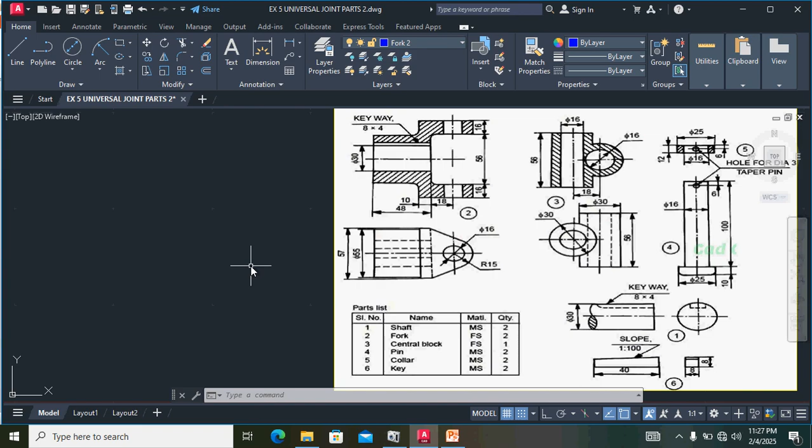Initially, we want to set the limits and set the limit units using the zoom command. So already we set that. Before this, I also set different layers.

For the shaft, I want to create one layer. Now I want to select the shaft layer. First of all, we want to draw the center line. So here we change to the center line, click the center line layer, use the line command, now we want to draw the line.

For the straight line purpose, we are using the ortho command. So we change the layer here, by layer, then we have to finish the center line.

After that, the diameter of the shaft is 30 mm. Here we go to line, change the layer by layer, next go to line, click this point. Here we want to change to the center line, by layer.

Now we use this line, click the line and click this point. The diameter of the shaft is 30, so we need one half side at distance 15, so give 15 mm. The length of the shaft is not given, so approximately we provide 100.

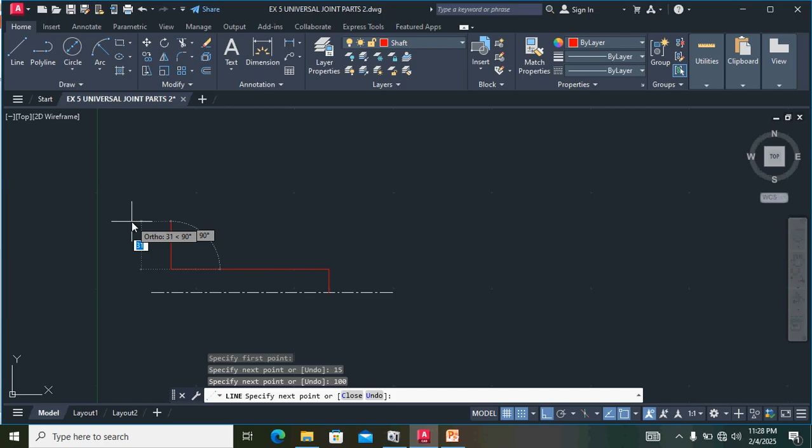Then we have to draw the line in the downward direction; the shaft diameter is 30, so we provide 30. After that, draw the line rightward, providing 100 mm distance. Then draw the line upward, providing 15 mm, then press enter.

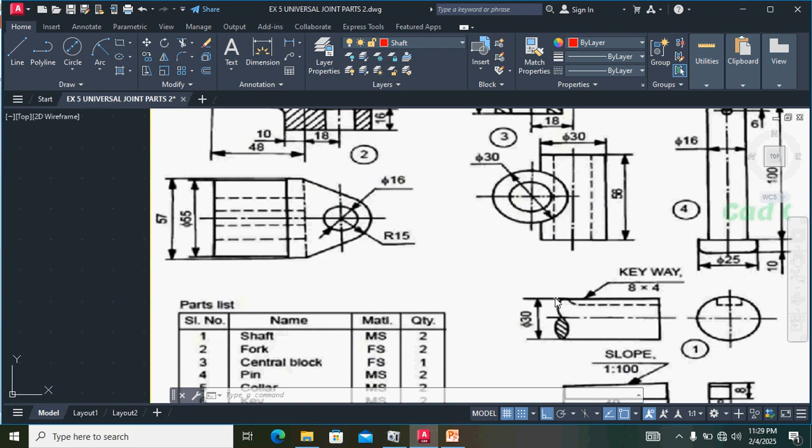In this case, we consider the diameter. We saw the shaft diagram; one end's shape is like this, so we want to draw this shape at the left side end of the shaft. Referring to the shaft diagram, for this purpose we use the arc command.

In arc, I want to select start, end, radius. So I click this point, click the start point, and here click the end point. Now I provide the radius value 25. So a 25 mm radius arc was created.

Next I want to select this arc and take mirror, mirroring from this point to this point. Now the arc was mirrored. After that I want to mirror both arcs together. I select these two arcs, go to the mirror command, click this point to this point as the axis, and then click exit.

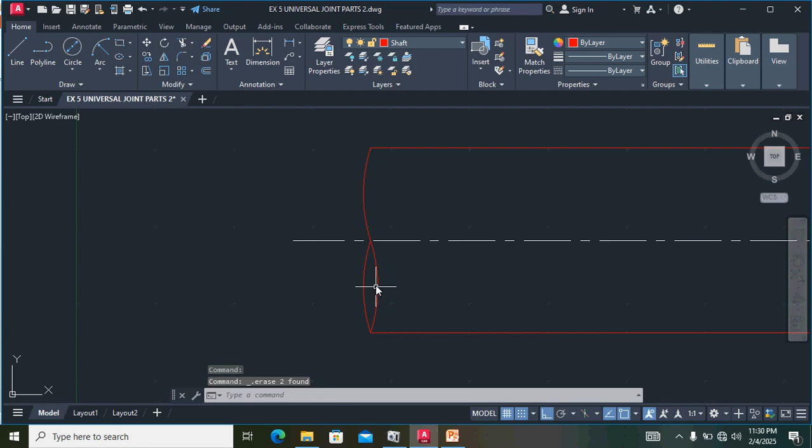Then finally we don't need this line and this side arc, so we delete it. In this area we want to apply hatching. For hatching purpose we click here and hatch this portion, then close the hatch creation.

Next, finally, we consider the shaft. In this case, they take a keyway at 4 mm from the top. So we select this line and take offset; the offset distance is 4 mm from the bottom of the line. Next we select this line at 80 mm, giving the distance 80 approximately, then we complete the offset.

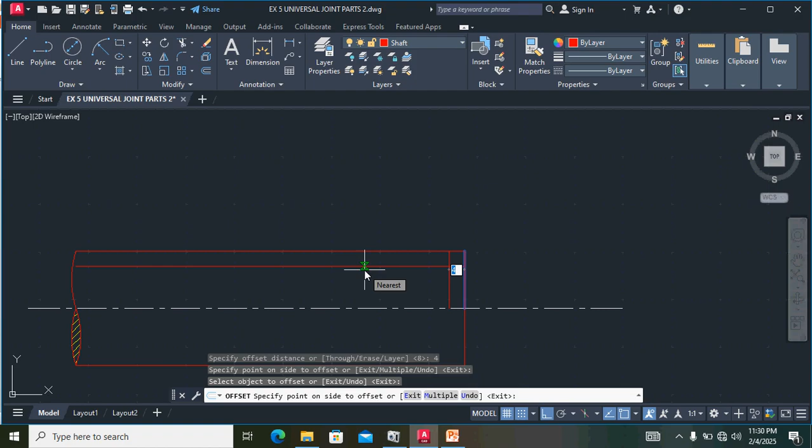Next we want to take a trim. So we provide a trim; this line we don't need, so trim this line, and this line also we don't need, just trim this line.

Next we want to take fillet for this portion. So we go to the fillet command and select this portion and this portion. In this case we need a radius, but since the problem didn't give one, we take an approximate radius of 4 mm. Next, click this line and also this line, so a 4 mm radius fillet line was created.

Next, this portion and these lines should be dashed hidden lines. So we select this line, go to line settings, and select dashed. Now we complete the shaft.

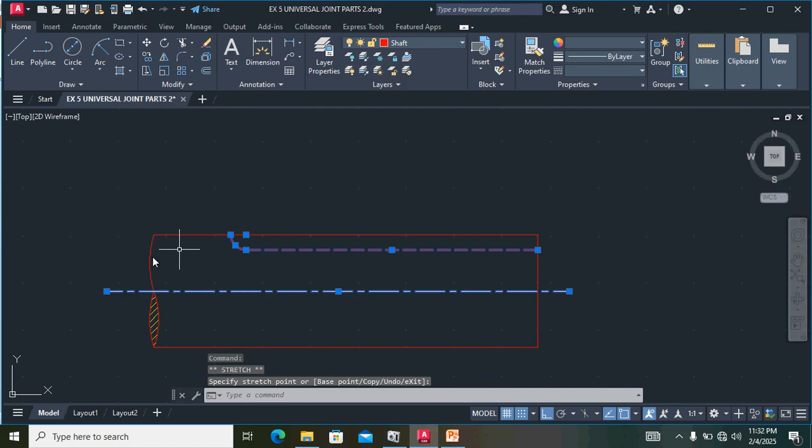In this diagram, in this concept, we have to reduce the center line. We want two numbers of the shaft in this diagram, so we have already completed one shape of the diagram.

Then we select this shaft and take mirror. Select the shaft and take mirror from the center point, from this center line. Now we've created another shaft.

Okay, now with the shaft, next we want to draw the fork. This is a fork component. So in this case, we want to draw the center line.

For the center line, we select this, copy this center line, and draw the center line from this point to this point. Copy and Control V. Next, we want to draw another line from this point to this point. So this is the center line.

So we already created one layer for the fork. We select this fork. Next we want to select the line. From this point, the height of the line is 28. Total height is 56, so one half of the distance is 28.

Click enter for this distance. Then we want to measure this distance. In this case, from the center point, the outer radius is 15 mm, so that distance is also 15 mm.

Select the line command and click the line from this point, 15 mm in the rightward direction. Click enter. Next, we draw the line in the upward direction, 16 mm. So this distance is 16 mm, then go to the rightward direction.

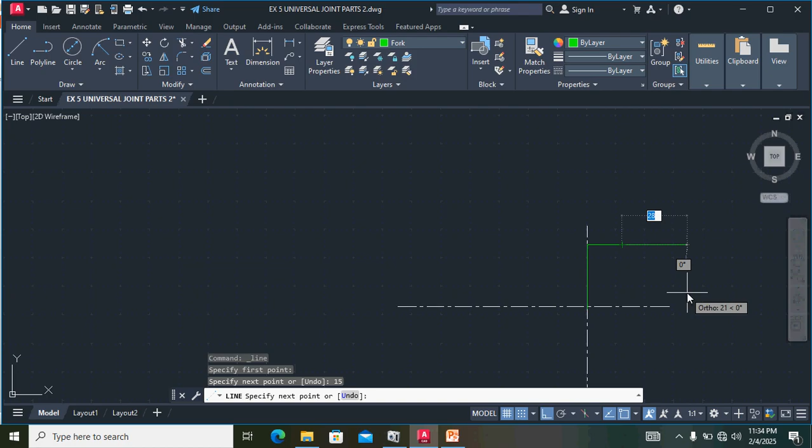Also 15. What's the diameter? I think from the center point, the diameter here is 15. So 15 mm distance, we need 15 mm.

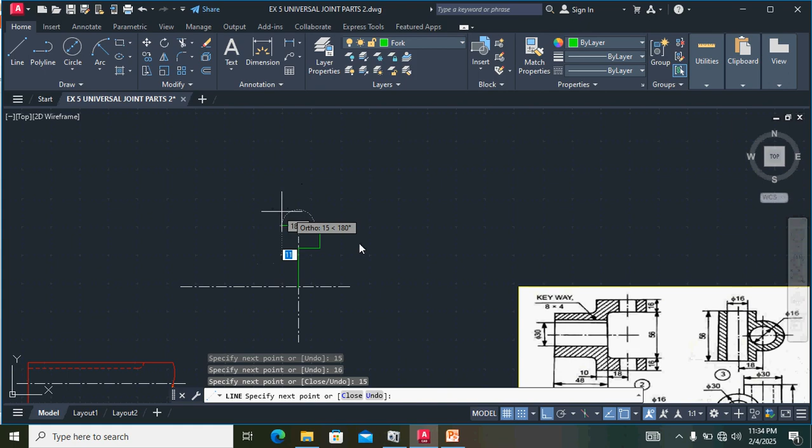Click enter. After that we measure the center point, from this point to this distance. Consider the diagram: this point to this is 18 plus 10, equals 28. So we want to draw a 28 mm distance line.

Then draw the line downward. The distance is 16. See the distance is 16, so we want to draw the downward line, 16 mm.

After that we finish the diagram here. Next, in this case, we want to take this distance. This is a 16 mm diameter hole, meaning from the center point, 8 mm to the left side and also 8 mm to the right side.

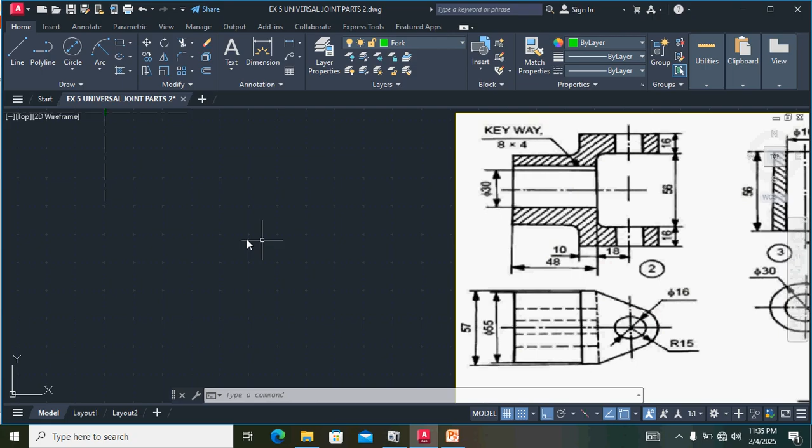First, I want to extend the center line in the upward direction. Next, I want to draw a line from this center point, from this point to this point. Click enter.

Now I want to click this point and take offset. Here the diameter is 16 mm, so I want to take 8 mm radius to the left side, and at the same time 8 mm radius to the right side, taking offset on both sides.

Now we erase this line, delete it. We select this line, we don't need it, so we delete it. After that we insert the diagram. Now we finish the 16 mm feature, this portion is also finished.

From the center point, this distance we have to draw this line. From the center point, this line distance is 18 mm. So we select this line, take offset 18 mm from the left side. Select offset, 18 mm distance, click enter, and click the left side of the diagram.

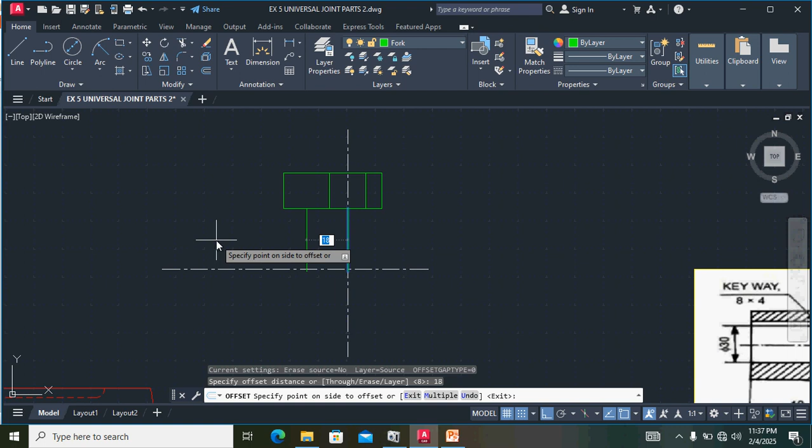Then after that we take the offset command from this point to this point. The total distance is 48. We want to take the offset command from this point, 48 mm in the leftward direction. We provide the value, 48 mm on the left side. We finish, then use the command.

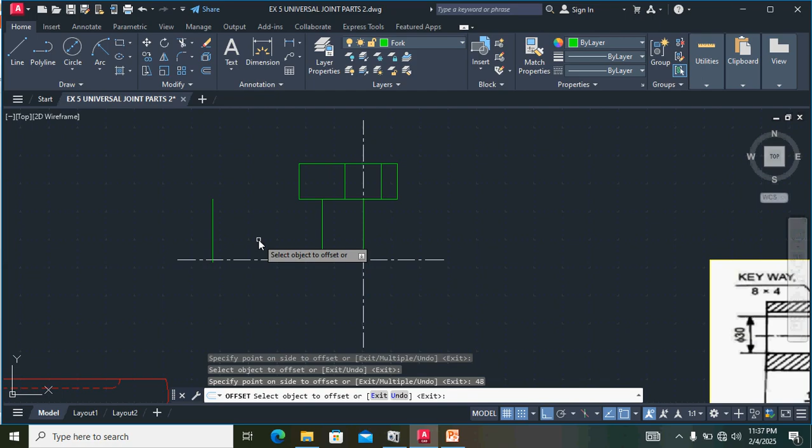Now we want to draw the line, click this portion, and also click this portion. Click enter. After that we want to take the trim command. Just type TR, then enter. Next we don't need this portion, so we click trim.

Next we want to take fillet. From the trim command we give escape. Next we go to fillet, and in this case we provide the radius value R, then provide radius 5. Actually 5 mm is not enough, we need 4 mm.

Just click enter. Now we select this line and this line, and a fillet arc will be created. The same way, click enter. We need this line and this line for a fillet. See the diagram, here the fillet is happening, and here also the fillet is happening.

So we apply the fillet, taking from the center to the 30 mm diameter line. For this purpose, we want to take the line.

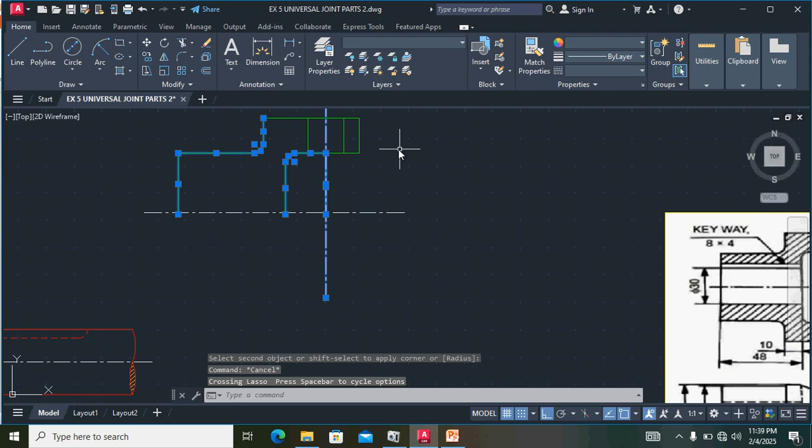Okay, in the diagram we have to just move in a rightward direction, above the direction. Just move the diagram, use the move command. The clicking point is from this portion to this portion. Click. Okay, all the diagrams are moving above the distance.

Okay, now we want to draw the line from this point to this point. Click here. Next type enter. Okay, see the diagram.

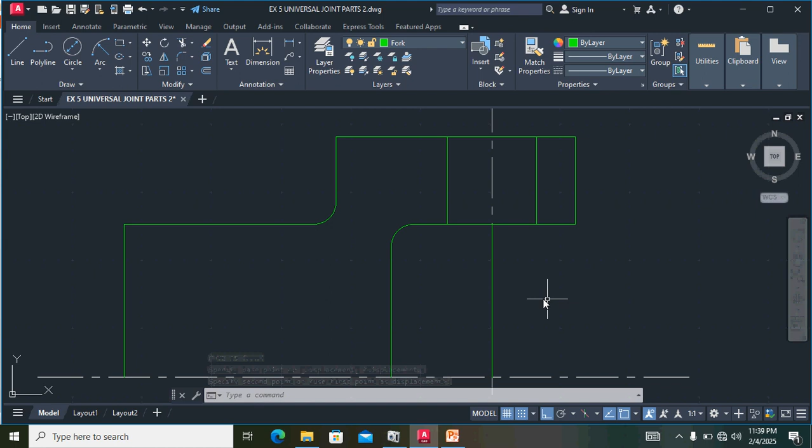Okay, now the diameter of that is 30 mm. We select this line and take the offset. 30 mm means above 15 mm, so we type 15 mm above the line. Type enter above the line.

Okay, now we want to take a keyway from this line to this line. So again we want to take offset. Select this line, and the distance above is 4 mm. Type enter.

Okay, now we go to hatching. In this hatching command, we select hatching, then select the hatching area. This portion and also this portion we want to hatch. Now close the hatch creation.

Now we finish half of the fork. Next, for the remaining half of the fork, we take mirror.

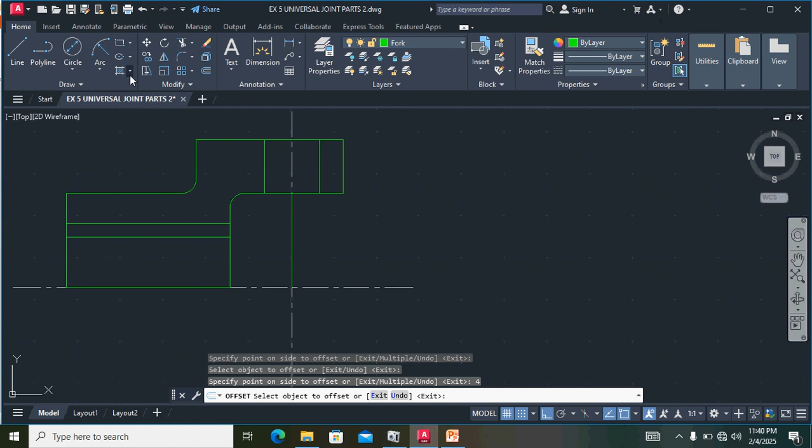In this case we select the object, select the portion, select all the portions. Next, mirror - we select the mirror command. From the axis we provide the reference from point, leftward to rightward. I provide the reference and click enter.

Now we finish the four components. In this case, we don't need these lines.

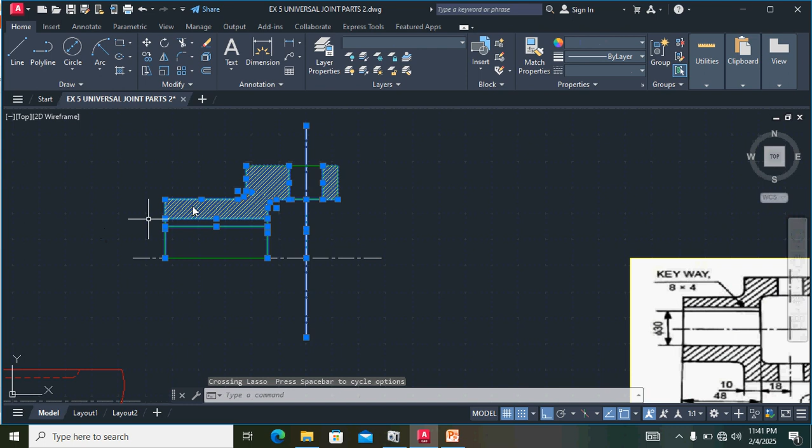Just select and delete. This line we don't need. Here also, this line we don't need. Just select it and delete it. If you don't need it, no problem, just delete it. This line we don't need.

Now we finish this part. Next, we have to draw the remaining fork. We have to draw this diagram, so in this case we have to draw the reference line, and we use these two references.

Okay, just select Control C and Control V. I want to draw the diagram in this portion. Now, the diameter of this portion, the distance of this portion is 57.

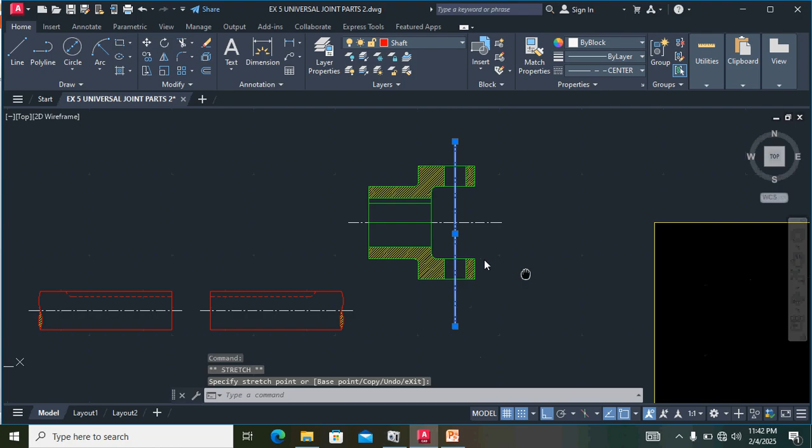57 means we have to draw the line. Select this line. So here we want to change the layer. Okay, here we already select the layer fork 2. We select the fork 2 layer. Next we select the line. Click this point and move, draw in a forward direction.

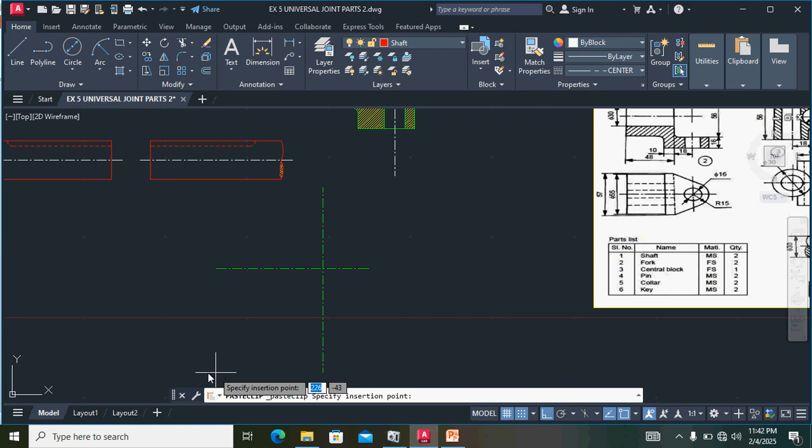Its distance is 10 mm, so we provide 10 mm. Click enter. Then we have to draw the downward line.

The distance is 57, and enter. And draw leftward in 10 mm. So we draw the line, 10 mm. Okay, 10 mm and enter.

Then we have to finish the line. Finish. In this case, okay, we have to finish. And it's finished, after the diagram.

No problem, just move the diagram, this line, this point to this point. The distance is 28.5. Type enter. Okay, type enter.

Now our diagram always touches the axis, so we select this diagram. The reference line we don't select, we don't need to select that. We use Shift to remove the selection.

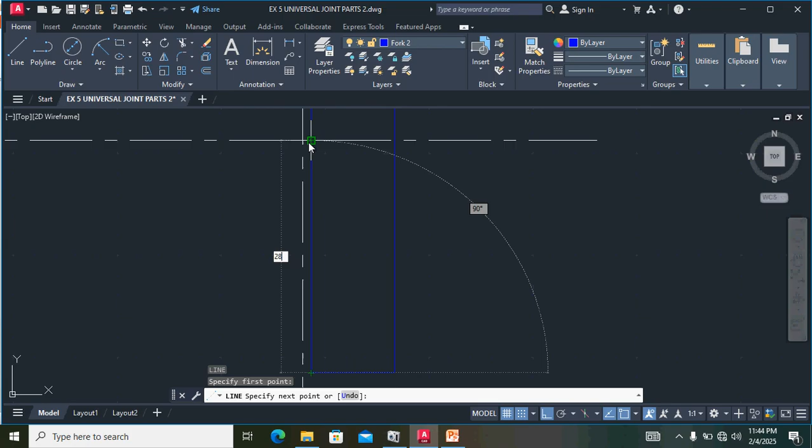This line, this line, this portion - move in reference. Just move, give the move command and enter. This point to this point. Okay, click enter.

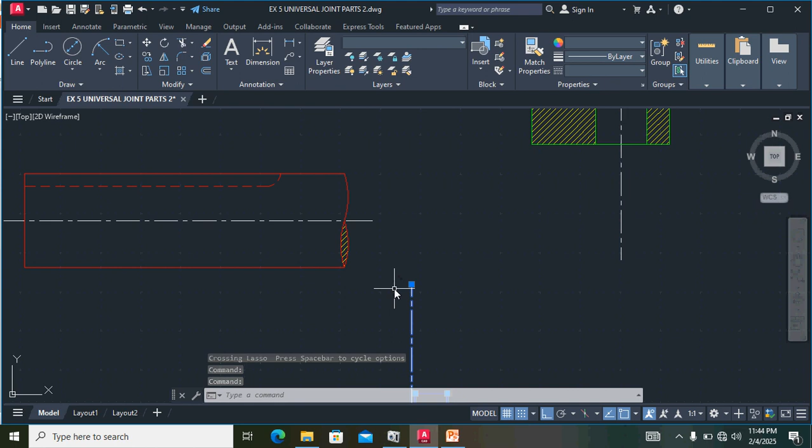Okay, now finish this portion. How do we finish this portion? We want to draw the center line. In this case, from the point to the center line is 18 mm.

We want to draw this line, and we want to take the line offset. Take the offset, 18 mm. We draw the line at 18 mm offset.

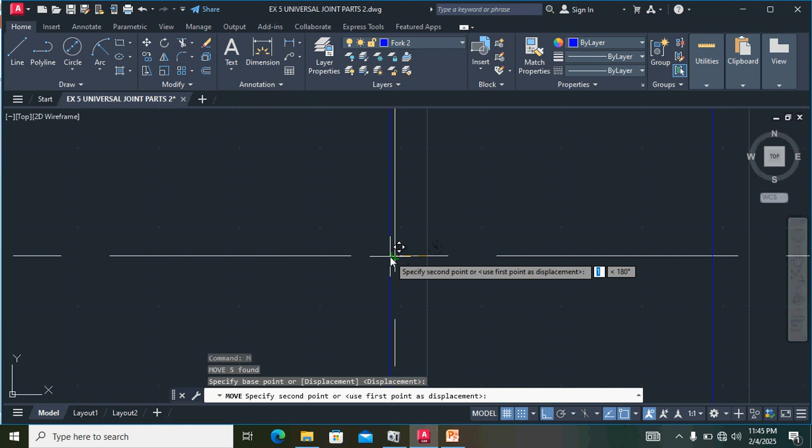Okay, we want to select this line and take offset at 18 mm. So I provide the value 18. Click here. So I want to change this line.

Here I want to change this line's properties. Select this line, just click here. Select this line - I want to change this property. Match this property here. Okay, now I change the center line.

Now we consider this diagram. Here we want this diameter to be 16 mm. For the 16 mm diameter circle, we go on to select the circle and select the diameter center.

So we choose this point and make the diameter. What is the diameter of the circle? 16 mm. Okay, 16 mm we provide.

Next, we have to draw another circle with radius 15 mm. In this case, we select center and radius. So we go on to select the center point. We just escape, we want to click the center point correctly.

So we provide radius 15. What is the radius of the circle? 15 mm, okay, we provide the value 15. Type enter, now we finish the circle.

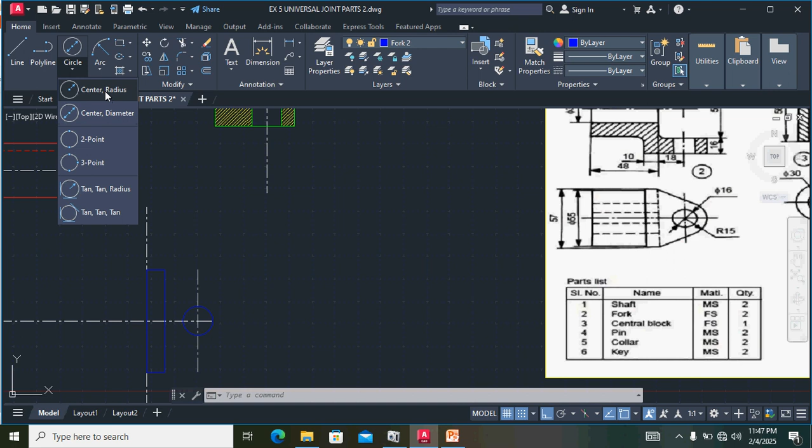We click enter. So we want to draw and select this tangent line, take mirror. Select the line and take mirror command.

Take mirror from this point to this point. Okay, now click enter. Now we want to trim unwanted lines.

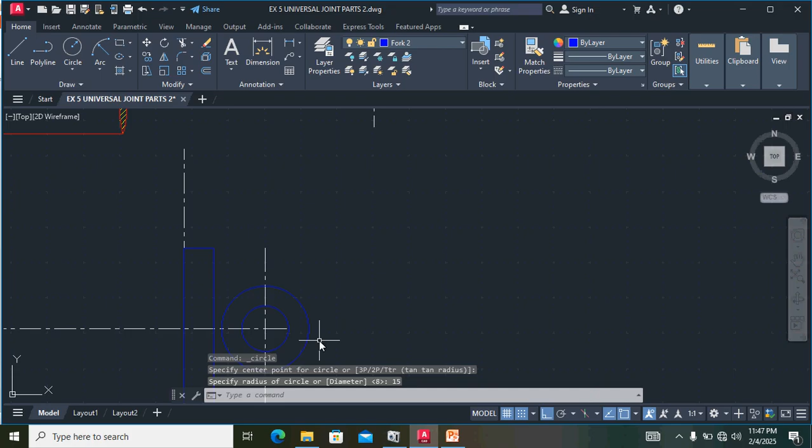So in this case we trim unwanted lines. We want to trim all these lines, trim the unwanted lines. Okay, that's all. Next we see the reference line.

Okay, this portion we completed. Next we have to draw this line. In this case we have to draw the remaining portions, like 55 mm.

So from this point to this point, we have to measure the distance. From the center to this portion is 18, 18 to this is 10. From this 10 point to this point is 48, we already drew the 10 mm. From this point to this point the distance is 38 mm.

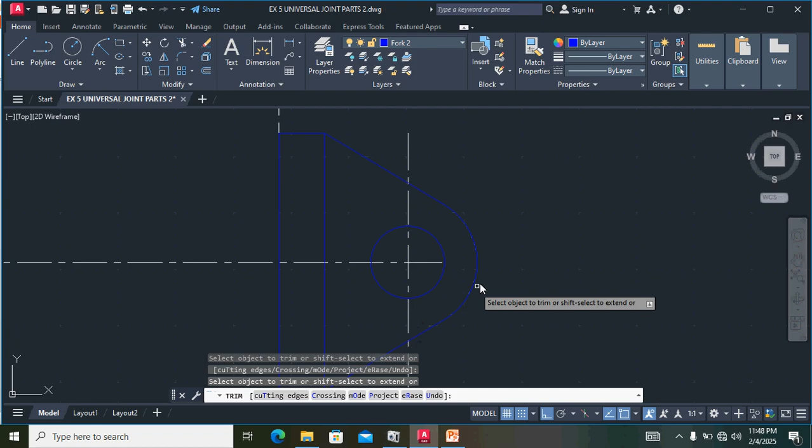So we want to take a 38 mm offset. In this case we want to take 38 mm. So we draw the line from this point to 38 mm.

Just click enter. Now we want to take the line and offset 55. 55 means 27.5, take offset 27.5.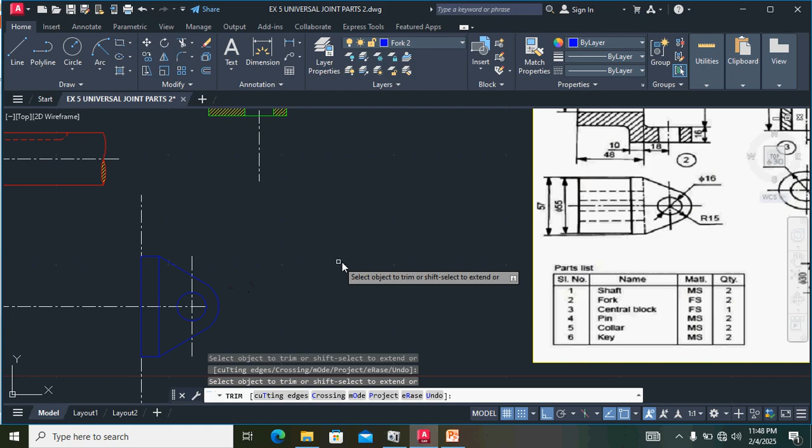Click enter above the reference axis and also below the reference axis. Now we want to finish the diagram. Now go to line and click this point to this point.

Type enter. Okay, now we select this line and delete it. Now we see fork two components. Now finish the fork two components.

In this case we want to mirror this portion. Okay, in this case we want to mirror this portion. We just draw the diagram.

So just click and also reduce this length, reduce the length of the diagram. Okay, we select the diagram and draw the line downward. Okay, we have to reduce it.

Okay, that's all. After that we have to select this diagram and use the trim command. We have to select this.

And now we have to take mirror or rotate. Okay, we have to take rotate. Select and click this point. Okay, in the opposite direction, it's rotated in the opposite direction.

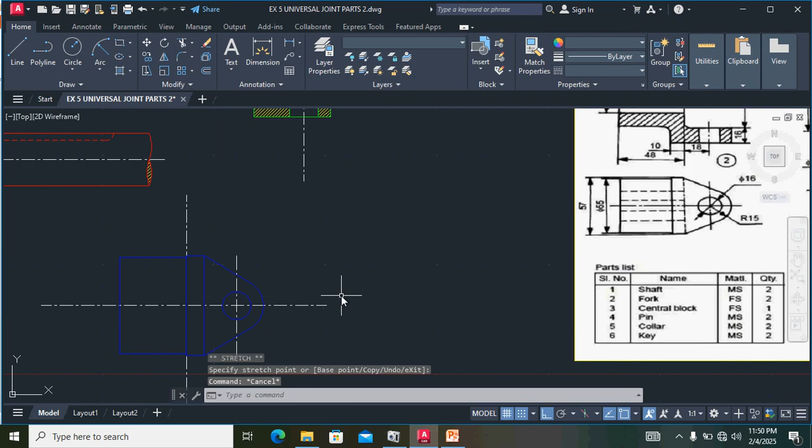Okay, now finish the fork diagram. After that, you have to draw the central block. Central block in this diagram, we draw the central line, the central reference axis. Next, the diameter of this portion is 30 mm.

The inner diameter of the circle is how much? 16 mm, okay. So we have to draw the length of the component, which is 56. In this shape, we have to use one reference axis.

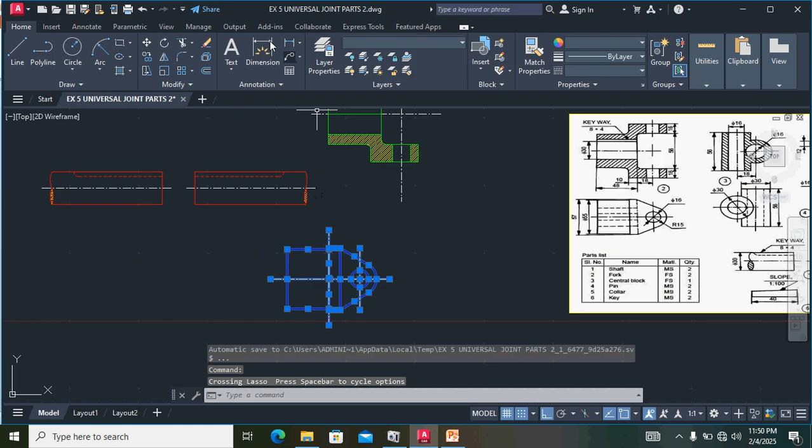Just select the diagram. Select the diagram. Just move this point to this point for the moving purpose of the object. Okay, that's no problem.

Now we have to draw the diagram here. Okay, that's all. Now we have to draw the central block.

Okay, now this is the central line. So the height of the line is 56. Okay, so we will draw another central line.

Just copy, Control C, Control V. Just move, just keep it. Okay, now we want to change the layer.

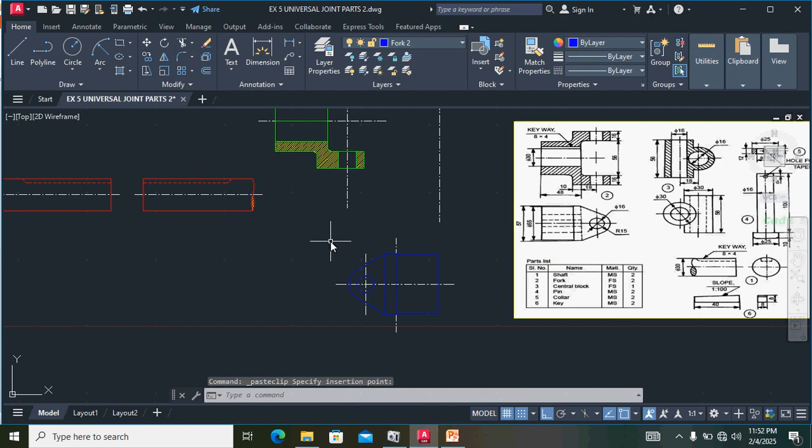In this case, we have to change the layer. Central block, we choose in red color. Select the line from this point, from this point to the height.

Now for the straight line, we use this line. We draw the upward line. 28, the height of the arc is 56. So we have to draw the line at 28.

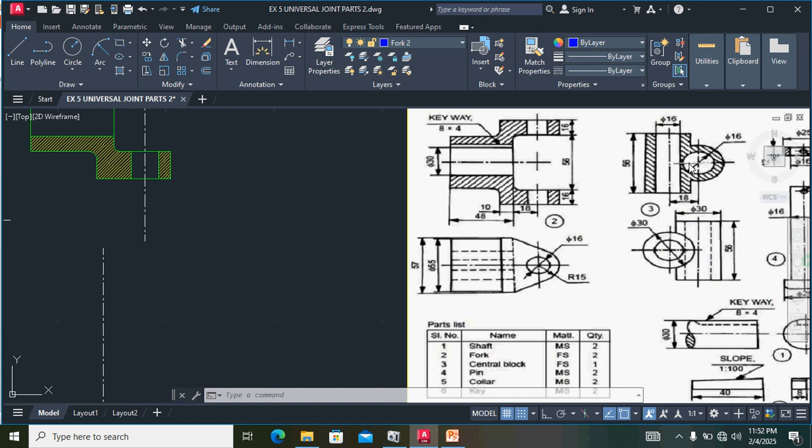Type enter. Next, the point is 30 mm, so we have to draw the 15 mm line. We have to draw the line on this side, 15 mm. So type 15 and click enter and draw the downward line.

Okay, the height of the line is 56, so we have to draw the line at 56. 56, type enter, and draw the diagram.

Here, 30. Okay, the diameter of the circle is 30 mm. So we finish it; we have to take the 30 mm, 15 mm, the diagram on this side is 30 mm.

Diameter of 30, diameter of 30. So we click and then click line.

Okay, click the line from this point to a height of 56. 56, type enter, and finish the diagram at 15. 15, we finish it. Okay, now we delete this center line.

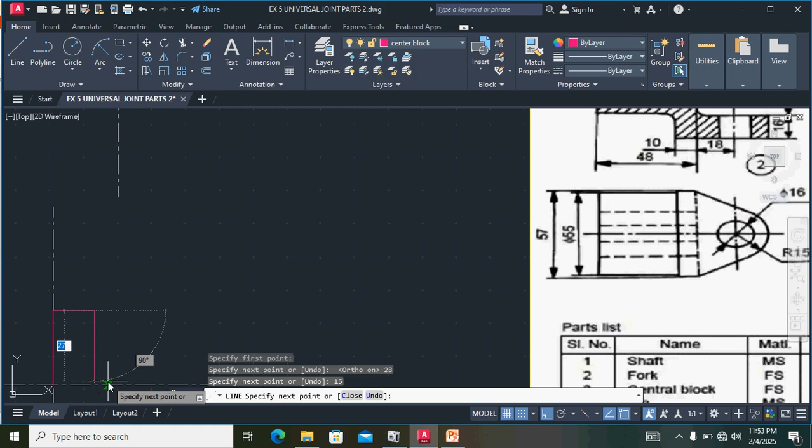Now this center line. Finish the 30 mm. Before the center line, we take a 16 mm diameter hole. So we want to draw one center line and also take the offset, left side to 8 mm and right side to 8 mm.

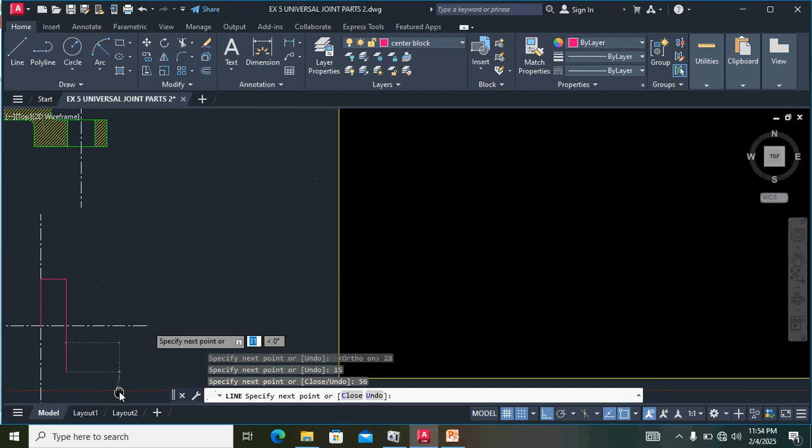First we have to draw the line from this point to this point. Click enter. Next, set this line and take offset 8 mm from the left side. Take offset, click enter. In left we click and also select the center line, click in right side 8 mm.

8 mm. Next we want to delete the center line. Next we want to draw the circle. Here we want to draw the circle.

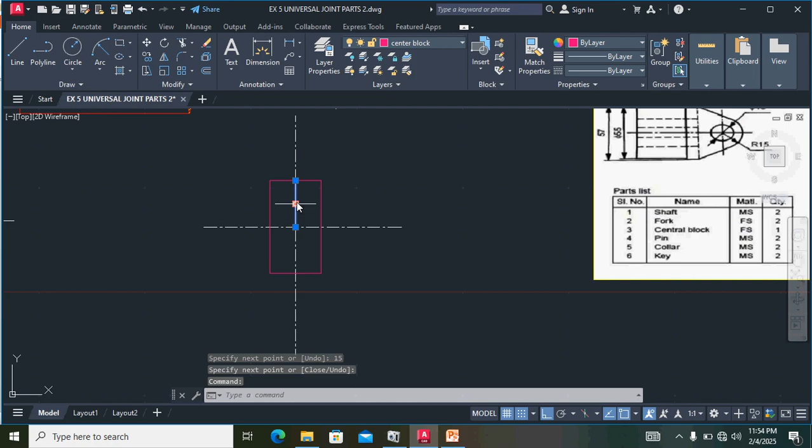Inside diameter of the circle is 16 mm. So we select the circle, select diameter, inside diameter.

Here we want to take an 18 mm center line from this point. From the center line we want to take 18 mm. Just click.

We want to select this line. Reduce the center line first. Now we reduce the center line.

We want to take offset. Select this point. The distance from the center point line to center line is 18 mm. So we provide 18. Just click here. That's all.

Now we want to draw the circle. The inner circle is 16 mm diameter, the outer circle is 30 mm diameter. Now we click escape.

Go to the circle, diameter of circle. Click the diameter of circle. This point diameter is 16. Inner diameter 16. We click, type the 16 mm, and also outer diameter of the circle 30. See the diagram: the inner diameter is 16, outer diameter is 30.

Select the circle and also go and select the center point. Specify center point. The outer diameter is 30. We finish the diagram.

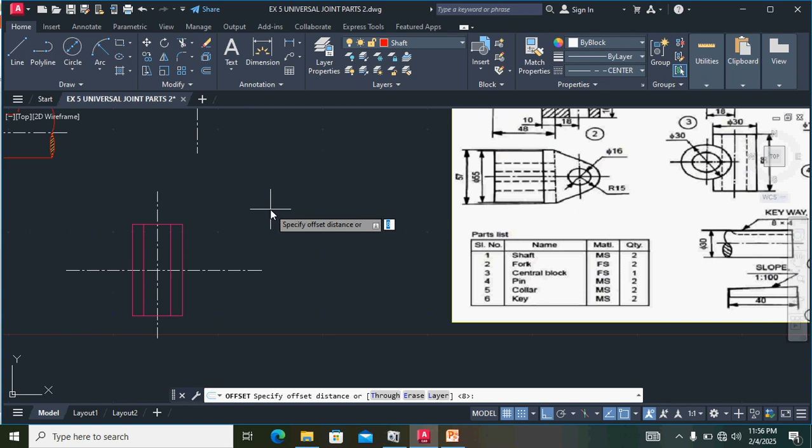This line, and this line we don't need. Now we finish the center block. Now we use trim command. Now we finish the center block.

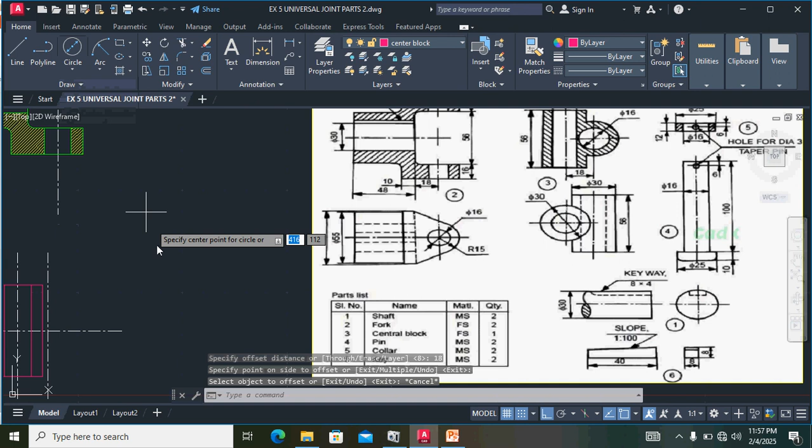Next we have to use the hatching command. We go to hatching command and select the diagram hatching portion, this portion, this portion, this portion, this portion, this portion. So these portions we want to hatch. After finishing the hatch, click close hatch creation.

Now we finish the central block. After that, we want to draw the pin. In this diagram, this is a pin.

The height of the pin is 100, the diameter of the pin is 16, the bottom head of the pin diameter is 25, the thickness of the pin is 10. So we want to draw the pin.

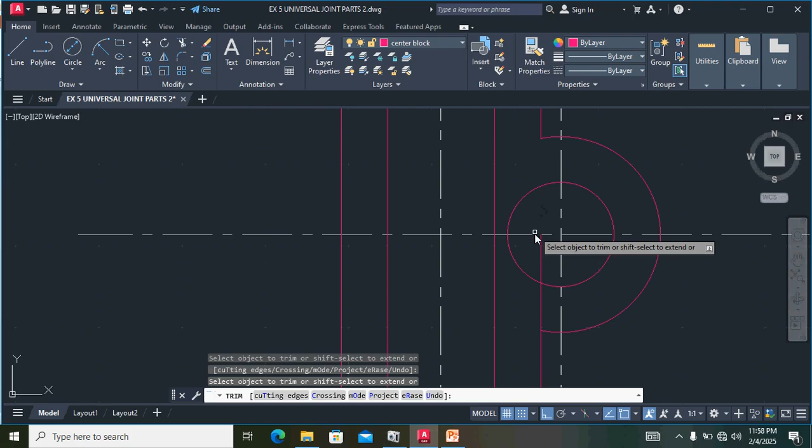In this case, we have to draw a center line from this point to this point. Select the layer center, draw a line. Here I want to use a normal line, by block. So we select a line from this point and approximately draw.

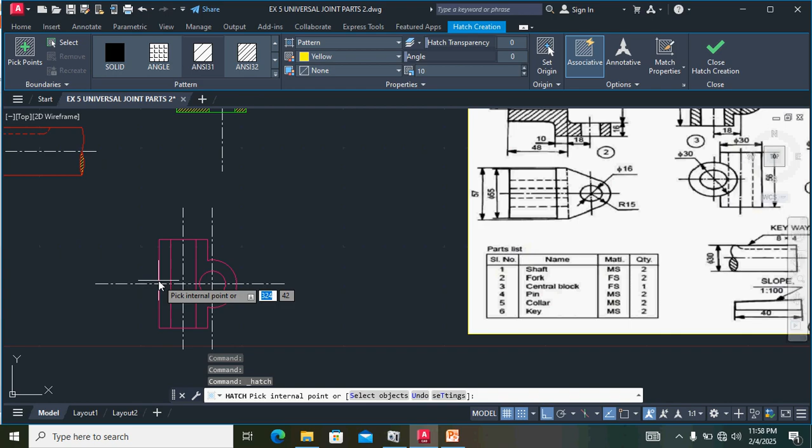Click enter. Just click the line from this point to this distance. That's all, this is the center line. So here we want to draw the top portion.

The diameter is 16. Here already we set the pin layer, so we select the pin. Here we have to change by layer. Now we select the line command.

From this point, the diameter of the shaft is 16. So the distance from center is 8. We provide 8 and draw the downward line.

In this case, we want to change the center line to by layer. By layer we want to change. So click the line from this point.

This distance, total diameter 16. So on one side the distance is 8. We provide 8 mm. Then we have to draw the downward line for 100 mm.

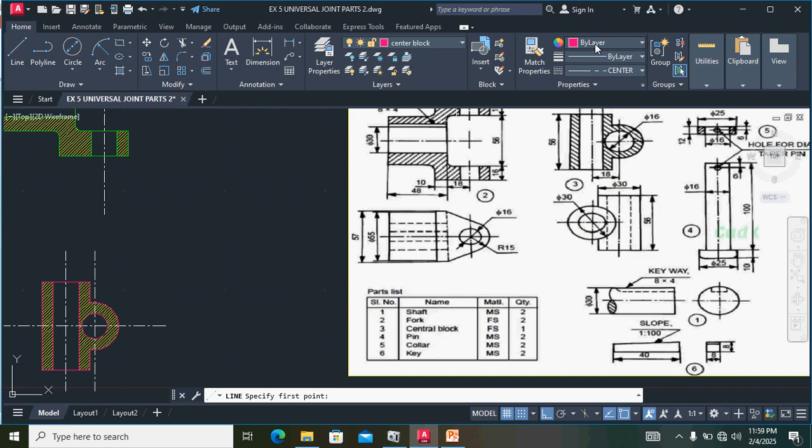100 mm. Then we have to draw the diameter of the shaft. Already we know 16, we provide 16, and we have to draw the length of the shaft 100 and move in upward direction. Then we click enter.

Then we have to change the rightward direction of the mouse position. We provide 8. Now we finish the diameter of the shaft and the length of the shaft.

In this case, we want to draw the bottom side, 25 mm diameter. So thickness is 10. We have to select.

We want to draw the line from this point, the diameter is 25 mm. That means this is 12.5, the half of the diameter. Just enter, click here and draw the line downward. Just escape.

Control reset. Now we want to select the line. From this point we have to draw the diameter, 25 means distance 12.5. Click enter. Then draw downward. The thickness of the head of the head bolt is 10 mm.

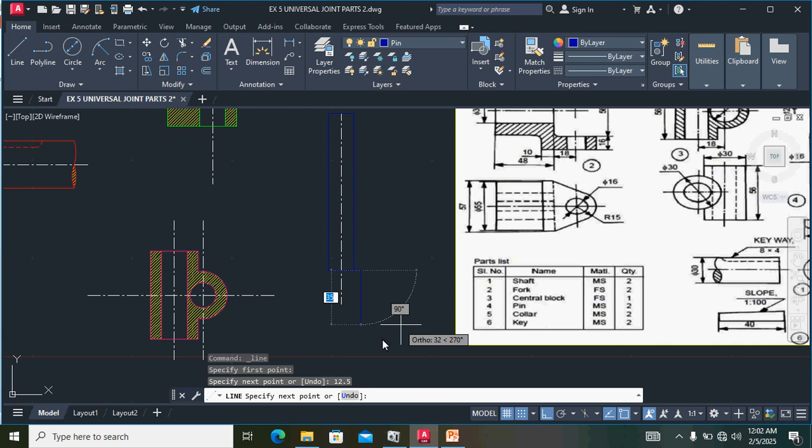After, we want to draw the smaller circle. The circle diameter is 3 mm. From the top, 6 mm distance we want the smaller circle, so we draw 6 mm. This line we take the offset 6 mm from the top to bottom.

Now we escape the offset. Next click circle, diameter of circle. We want to select this point. The diameter of circle is 3 mm, so click enter.

Now we extend the center line. Escape. In this case, we select this line, click in and out. Now we finish the pin. After, draw the collar. In this case, see the collar dimension.

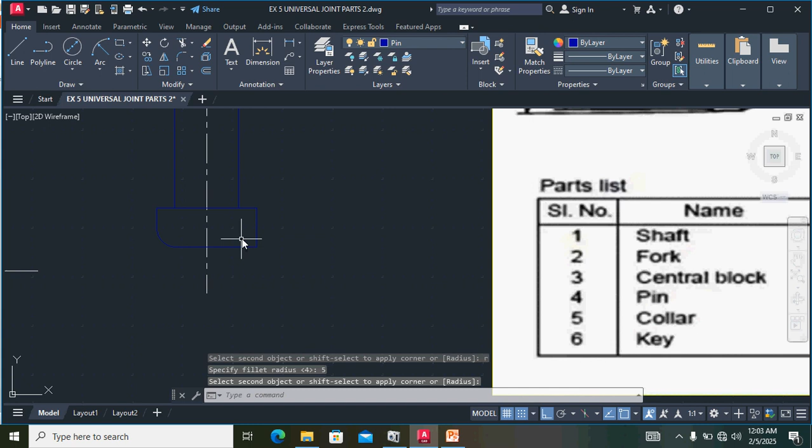This is the collar. The diameter of the collar is 25. The inner side diameter of the hole is 16 mm. The thickness of the collar is 12. In the center of the collar we have to draw the smaller diameter circle, 3 mm diameter, so we have to draw the collar.

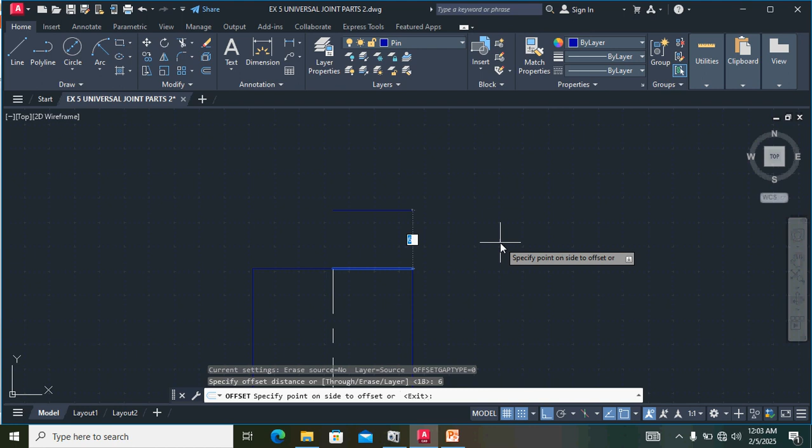So we just go to the collar command. In this case we don't use the collar layer; we use the pin layer for collar. So we go to line command. The diameter of the line is 25. Draw the line and give the value 25, and give the thickness.

Thickness of collar is how much? 12 mm. Thickness of collar is 12 mm. Next, this distance is 25. Next, in the downward direction 12. Okay, we finish the collar.

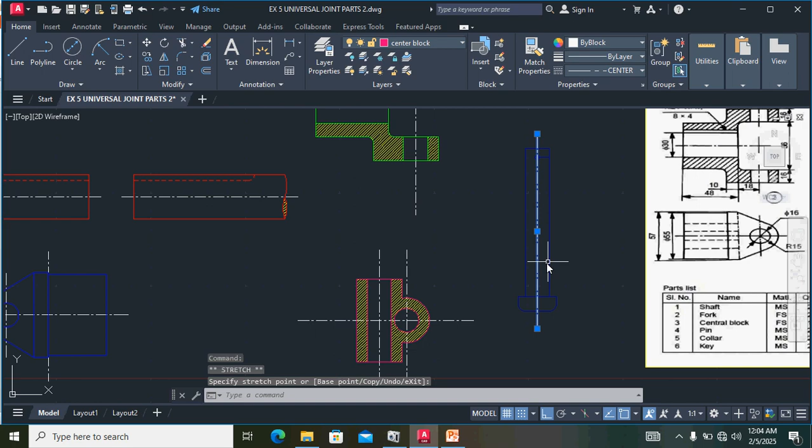Next we want to draw the center line. For the center line, we draw from this point to this point. Next we want to take an offset. See the offset from the center point, the hole diameter is 16 mm.

So from this line we want to take the offset command. 16 mm means we want to take 8 mm to the left side and also 8 mm to the right side. We select this line, choose and extend this line. Now we escape, select this line and try.

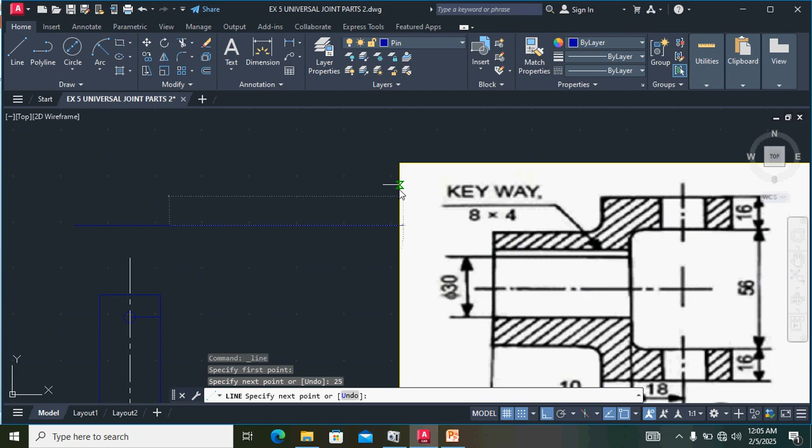So now we have to use this line. Match properties to this line. Escape. Now we want to select the center, match property to this line. This is the center line we change. After, we want to draw another center line.

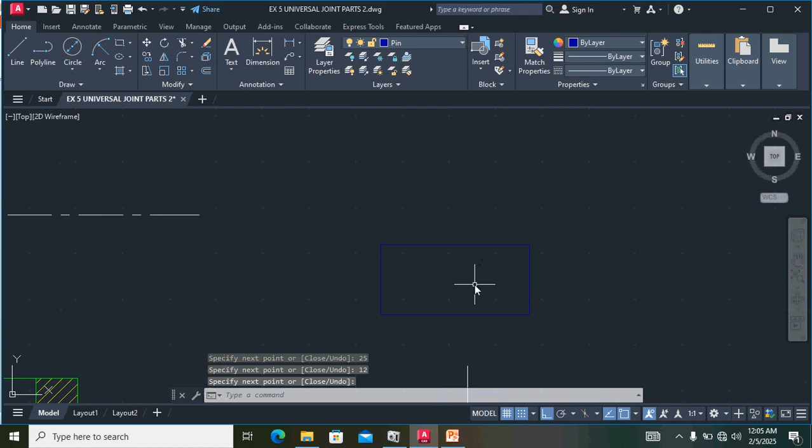So we want to draw the line for this center point. Here we finish. We select this line. Now click escape, select the center line, select match properties, and click this line. Now we finish.

Next we have to draw the small hole, on center. The smaller hole diameter is 3 mm. So we want to draw the circle diameter from here, this point, the midpoint of the line, diameter 3 mm. We provide 3 and click enter.

Now we finish the collar. Finally we want to draw the pin joint key. Select the layer key. Finally we have to draw the key.

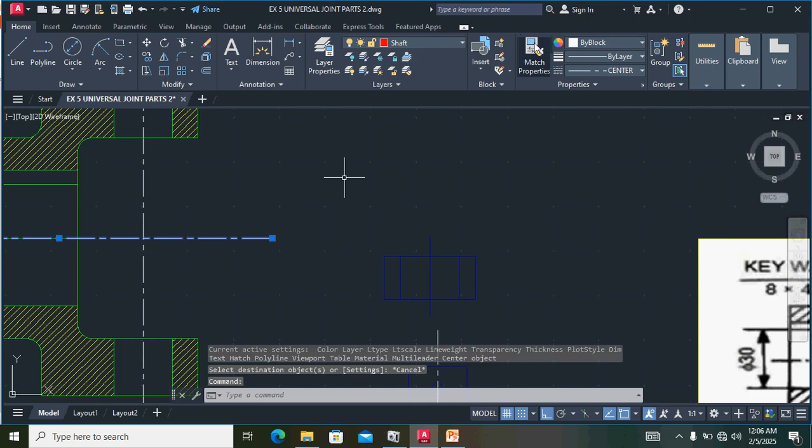Here see the distance, this is 40 mm length. The right side height is 8 mm. The left side slope is 1 is to 100, so 8 minus 0.4 is 7.6. Left side height of the pin is 7.6. Right side height of the pin is 8 mm.

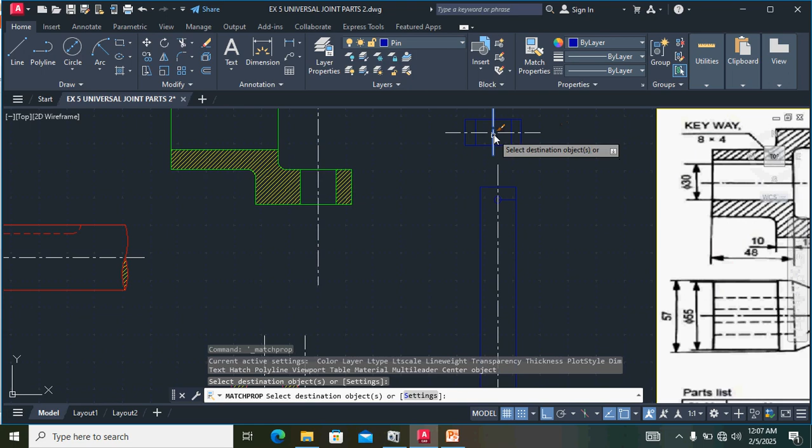So in this case we have to draw the pin. Just select the layer and click the line for the pin. Here the downward distance is 8 mm. Next, in the leftward direction, its slope distance is 8 mm. The height of the pin is 40, the length of the pin is 40 mm.

Next is 1 to 100. The 8 minus 0.4 equals 7.6 mm. This side distance is 7.6. Enter, then click the point, and click this portion.

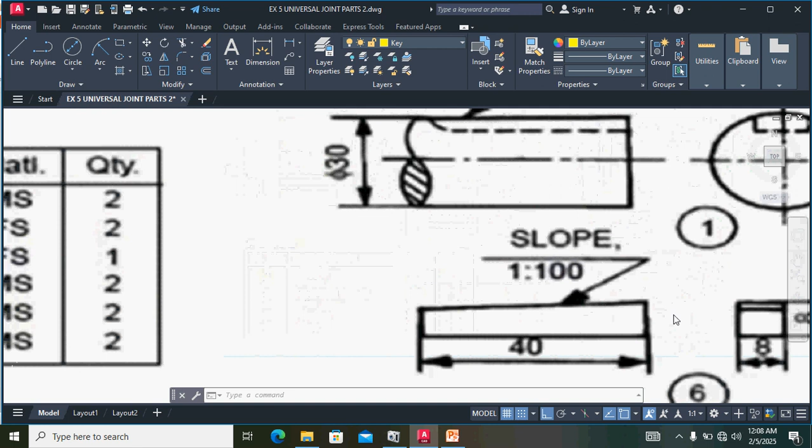Now we finish the pin. After this we want to make a mirror. We finish the pin and then draw a mirror command, completing the diagram. We take the mirror from this point to this point, click, and now complete all parts of the given universal joint.

Next we want to draw the assembly. First of all we have to draw the assembly. For the assembling view we have to select the component. Select the shaft, we want to select this shaft.

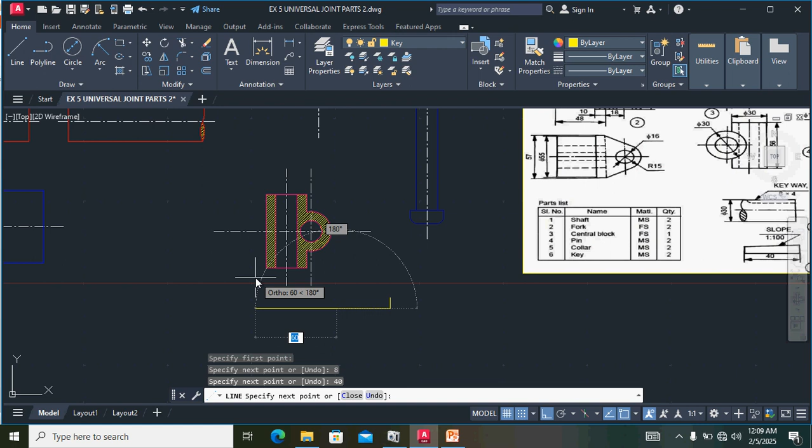Select all the portions, then use the move command. Click move and click this point, then move and click this portion. Now we assemble the shaft to the fork.

After this we want to draw the central block. In this case we have to rotate, and change this distance to this distance.

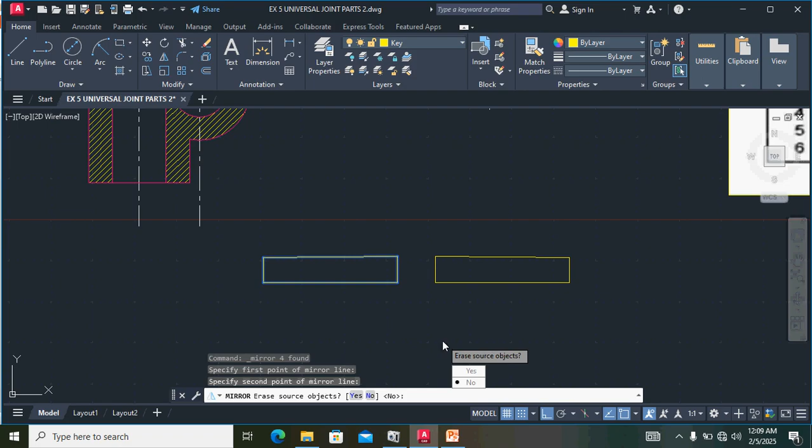Now we have to assemble the central block. We select this portion, select all this portion, and next here we want to select. We selected all of the central block.

Now we use the move command. We have to move, go to move command and click the point. Click this point, click this point, then go and click the center line of the given diagram.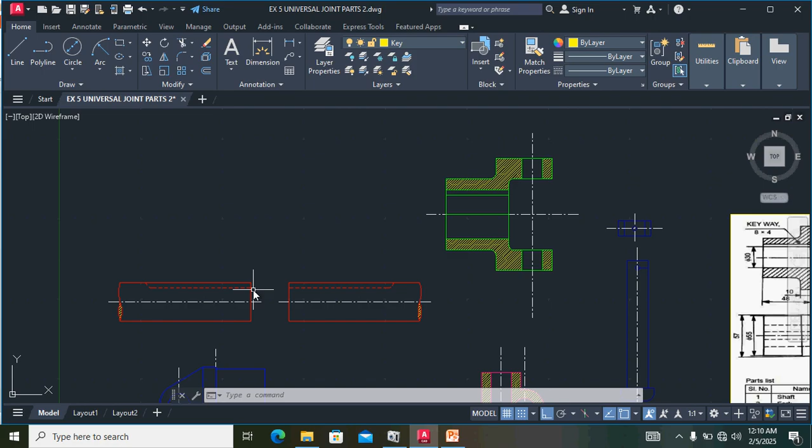Here we want to fix it. Here we assemble, and the central block is fitted correctly. No problem. Next we want to move and assemble the other four points.

We select this component, select the move command, and click this center line. Click the center line and go and assemble.

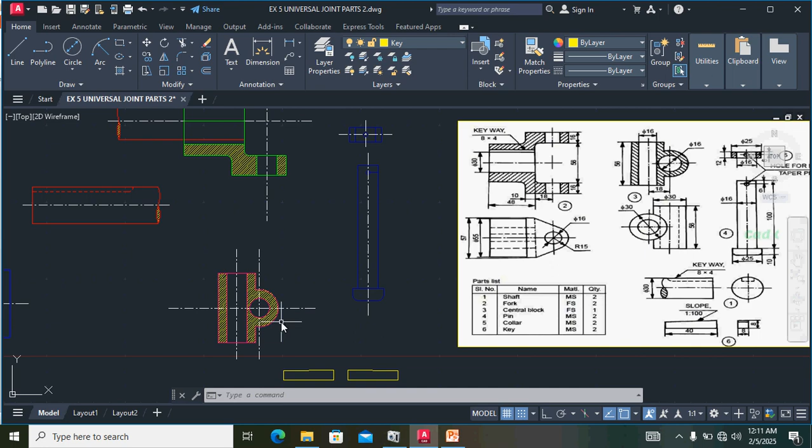Before that we have to move the pin, as it will disturb the diagram. This portion we have to move, we have to move here.

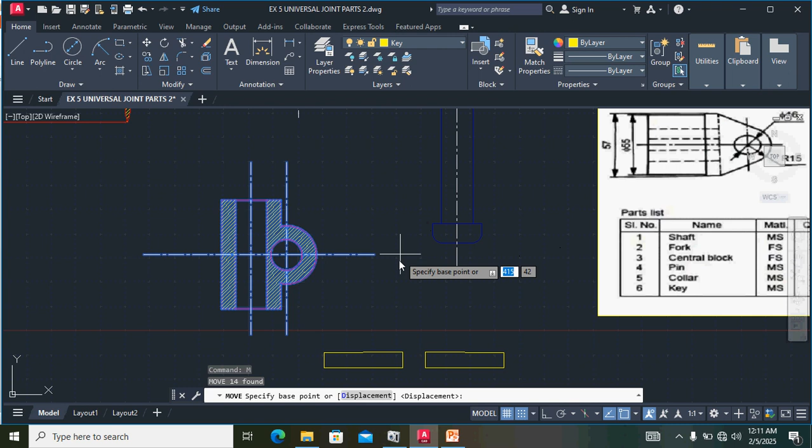Select this portion, select and move from this point to this point, select, move from this point to...

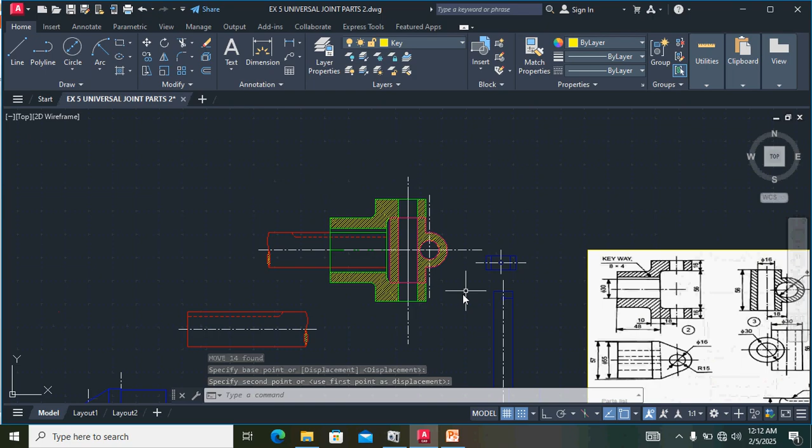Now we assemble. We have to move this component to this point, using the move command. Select the center of the circle, then move this component, and also fix this center line. Now the fork part also fitted correctly.

Next we want to move the pin. This is a pin command, this is a pin part. You have to select the diagram, select all the points.

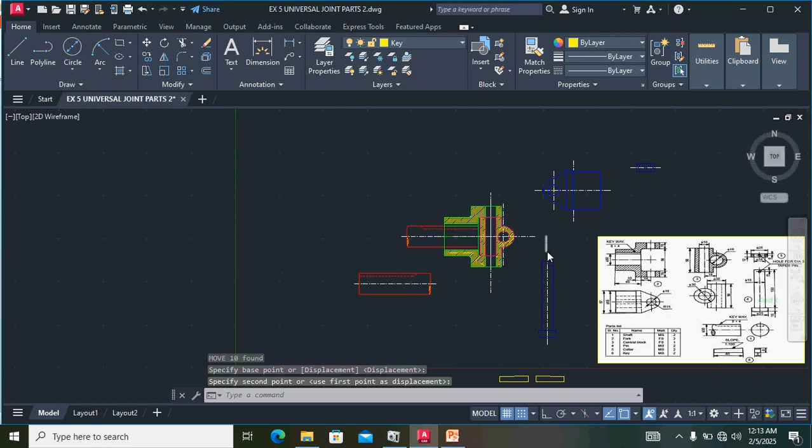Here also we want to select, everything we want to select. Now we go to move, select the move command, and click enter. Click this point, move the pin, and also fix this place.

Fit this point. Now the pin is fitted correctly, so this reference line we don't need, just erase it. No problem, finally we have to erase it, since it was for reference purpose only. Next we have to fit, now we fit the pin.

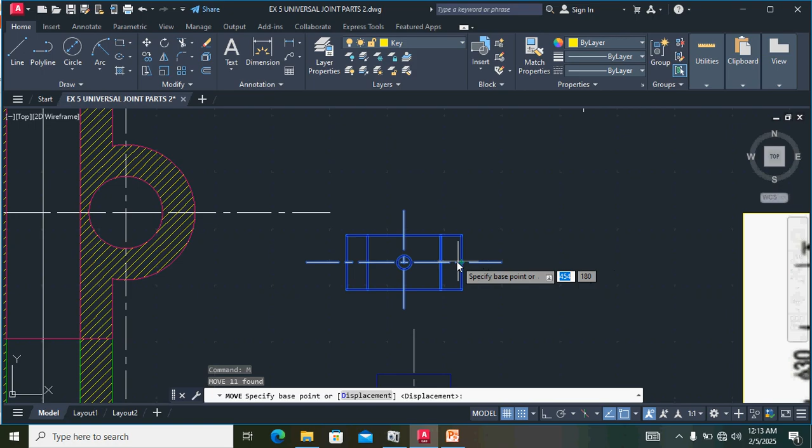After this we have to fit the collar. We select the collar, then go to move command, type M, and select the center point of the collar.

Next we have to fix this collar at this point. Fix, okay, it's fitted correctly. Now we fit the collar and pin successfully.

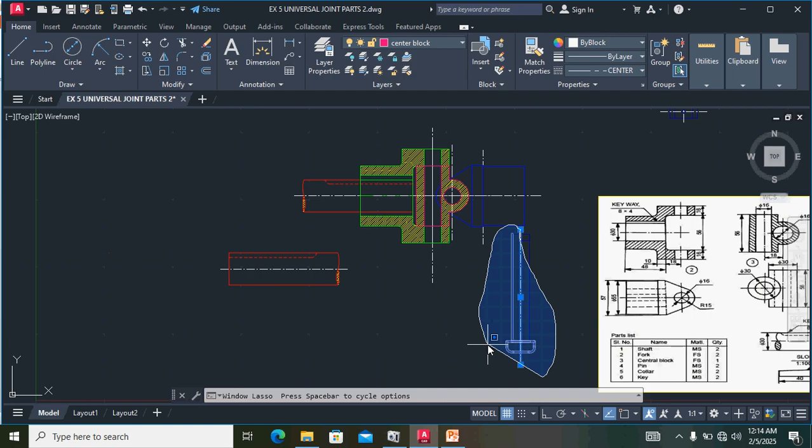Finally we have to finish the other shaft. In this case we select this shaft, and next enter the move command. From this point we select and move the component, and also fix here, fix this point. Now we finish the other shaft on the outer side.

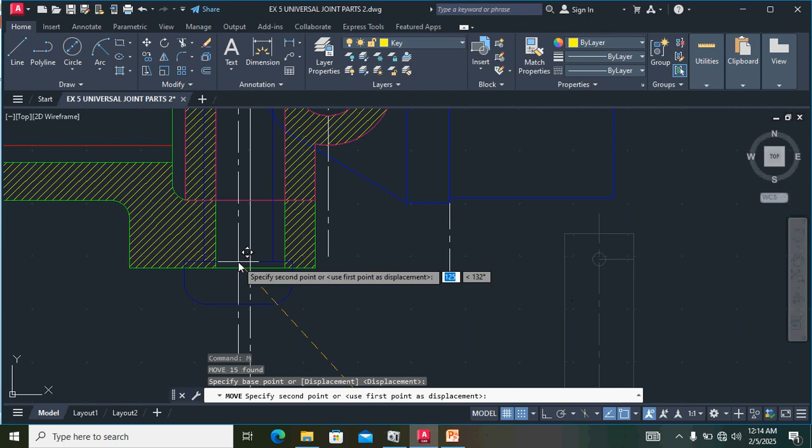Finally we have to insert the keys. Here we have to insert this. We select this key and select the move command, select this point, and move this portion.

Here we want to fix it, here want to fix here. The other key we select on the opposite side, and move it using the move command. Click this portion, click this portion.

Then go to the overall diagram, so we want to move here, move here, this portion we want to move. Okay, this is the final assembly view.

This is the sectional and assembly view of the universal joint. If you have any doubt, ask in the comment box.

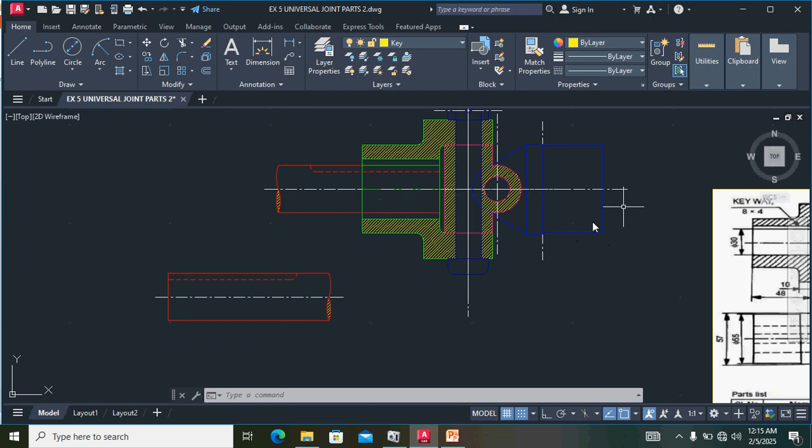These are all the parts diagrams. By using this parts diagram, we have to draw the part diagram, and finally we have to assemble the final diagram of the universal joint as given.